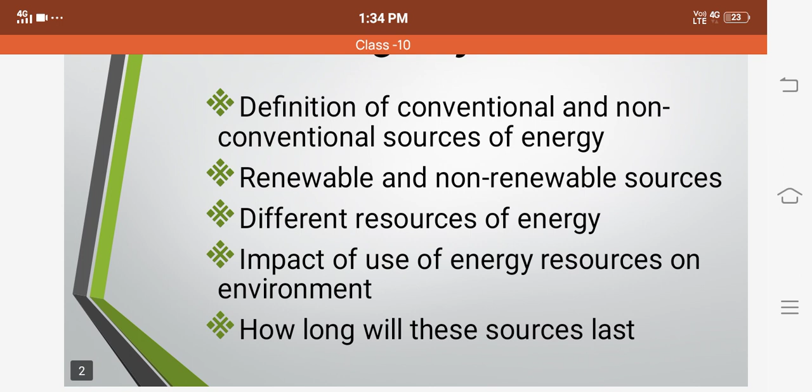In this chapter, we will cover definitions of conventional and non-conventional sources of energy, renewable and non-renewable sources of energy, different kinds of sources of energy present around us, the impact of use of energy sources on the immediate environment, and how long these sources will last. Coming first to conventional sources of energy.

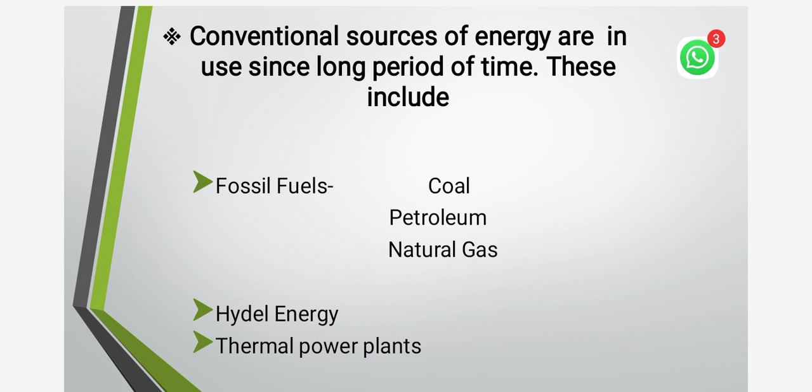Beta, these sources are in use since a long period of time. That's why these are called conventional sources of energy. These include basically fossil fuels, and fossil fuels are of different kinds like coal, petroleum, natural gas, which are obtained from fossils that got buried in the soil or under the sea millions of years ago. In addition, hydel energy and thermal power plants also use these conventional sources of energy.

Non-conventional sources of energy are those sources which are alternatives to conventional sources of energy. These sources are also known as renewable sources of energy, as they are widely available around us. These will not exhaust in the near future. For example, solar energy - the sun rises every day, so its energy will not exhaust until the sun ends.

Conventional sources will run out in the near future if we don't save them. That's why these are known as non-renewable sources of energy. Beta, here we can say that conventional sources of energy are non-renewable sources of energy, whereas non-conventional sources of energy are renewable sources of energy.

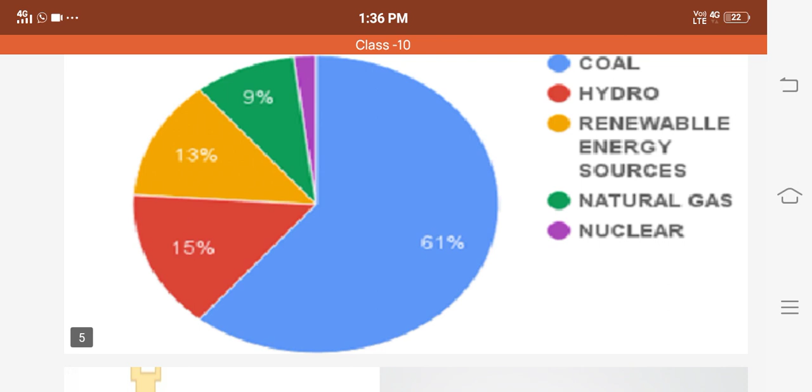In India, over the last decades, different kinds of energy sources have been used. For example, coal made up almost 61% of the total energy requirement in recent decades, whereas 15% of energy was generated from hydropower, and natural gas formed only 9%, while renewable sources were only 13%. A little energy was also obtained from the nucleus, known as nuclear energy.

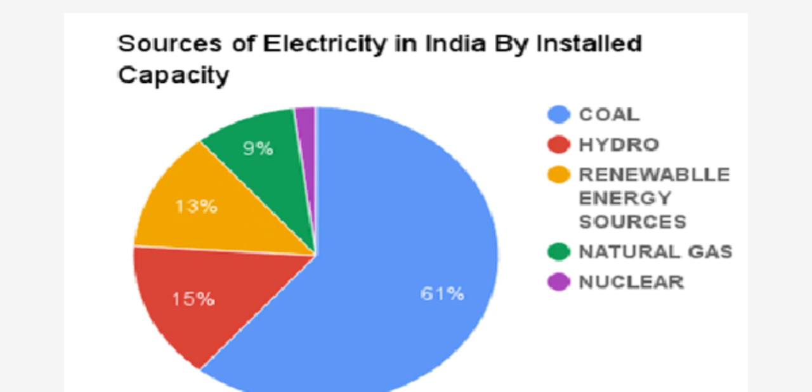So the use of renewable sources is very low till today, and these need to be increased in the present as well as in the future. First, we will consider conventional sources of energy.

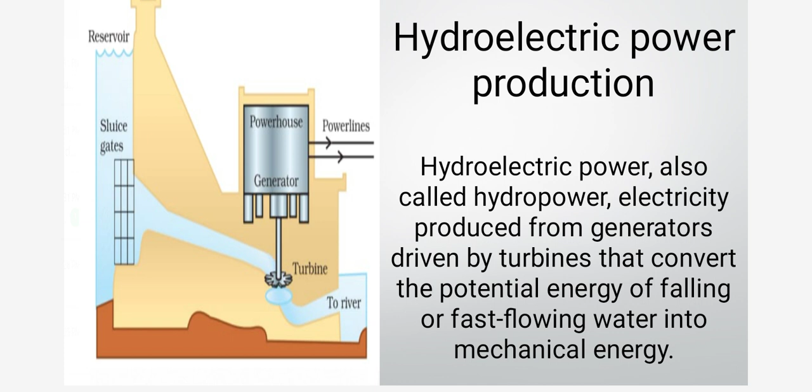Hydroelectric power production basically uses the energy generated from water. Here the water moves and its kinetic energy is changed into electricity by running the turbine. When turbines run, the kinetic energy of the water changes into the mechanical energy of the turbine and gets converted into electricity. So finally we get electricity from the potential energy of standing water, and this is generally generated at dam sites.

So here different forms of energy are changing. For example, I am repeating it again: heat first changes into kinetic energy, kinetic energy changes into electricity, and electricity changes into light and heat through the use of the bulb.

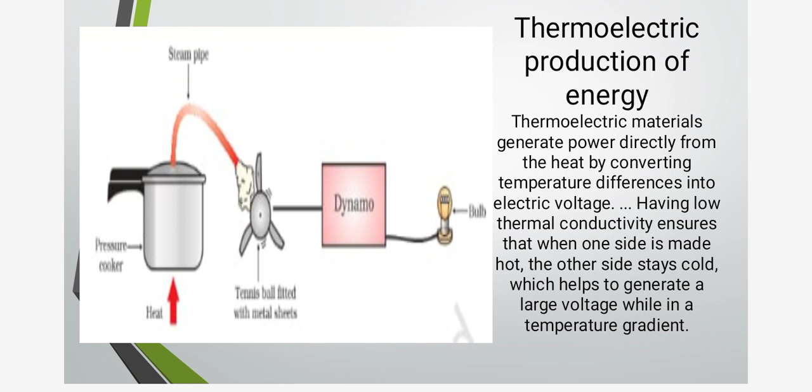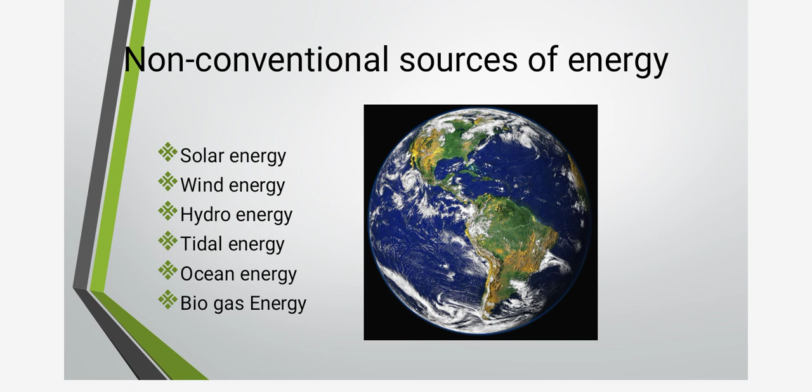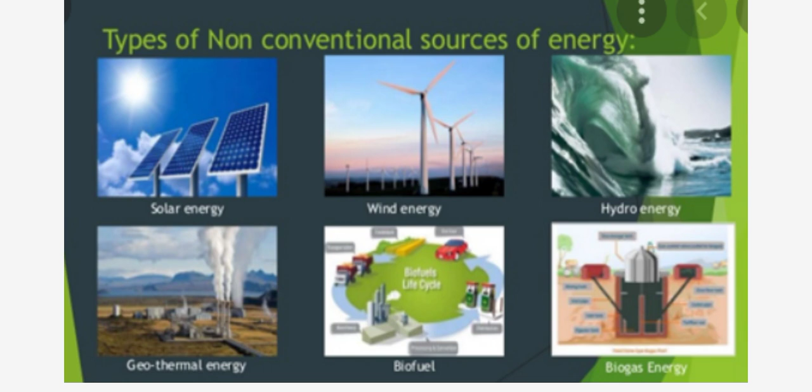Various kinds of non-conventional sources of energy being developed these days include solar energy, wind energy, hydro energy - especially from moving water - tidal energy, ocean energy, and biogas energy. These have different sources like solar energy panels, windmills, biogas plants, etc. Coming to solar energy.

The sun is a vast source of energy for us, and we can use it for different purposes like heating and producing electricity. For producing electricity, we generally use solar cells. One solar cell is capable of developing a voltage of 0.5 to 1.0 volt, which produces only 0.7 watt of electricity.

This electricity is a very small amount and is not capable of doing any work. Therefore, a single solar cell is not capable, and we need to form a solar panel by arranging different solar cells. The total energy produced by the different cells is used for generating electricity, lighting our homes, and heating water in geysers. Solar cooker is also a very old system of cooking food using solar energy.

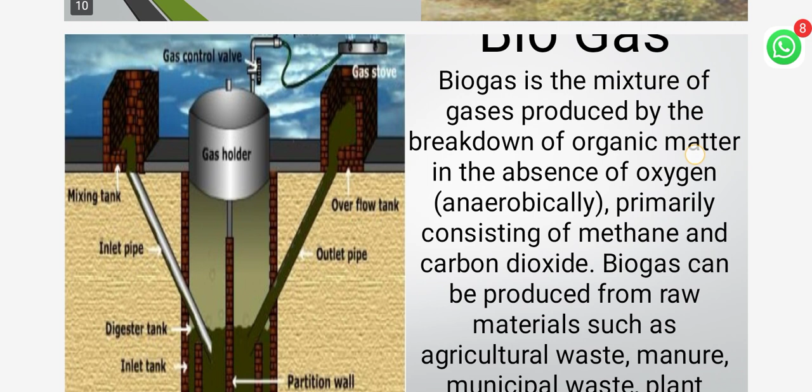Biogas. This is another method of using a conventional source of energy but in a technically improved manner, because bio sources like plant and animal excreta were used long ago in India for generating energy, and that was harmful for the environment also. Therefore, with new technique, biogas started to be formed.

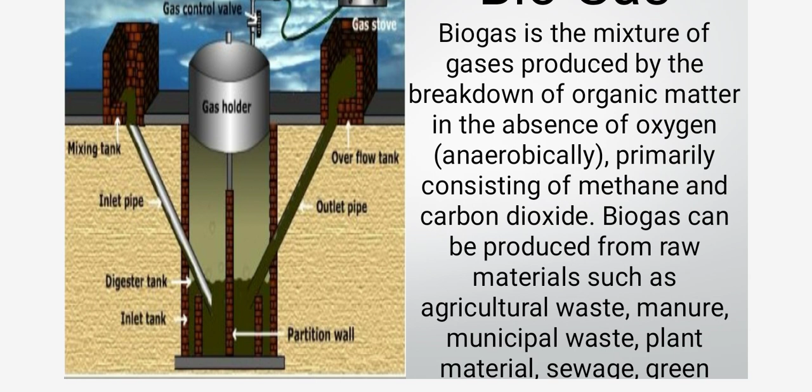In a biogas plant, plant and animal excreta, in the absence of oxygen, that is an anaerobic condition, forms methane and carbon dioxide, which are known as biogas. So we can say biogas is a mixture of different gases like methane and carbon dioxide. This can be produced from raw material, which may be plant product or animal product like manure, municipal waste, plant material, sewage waste, green waste, etc.

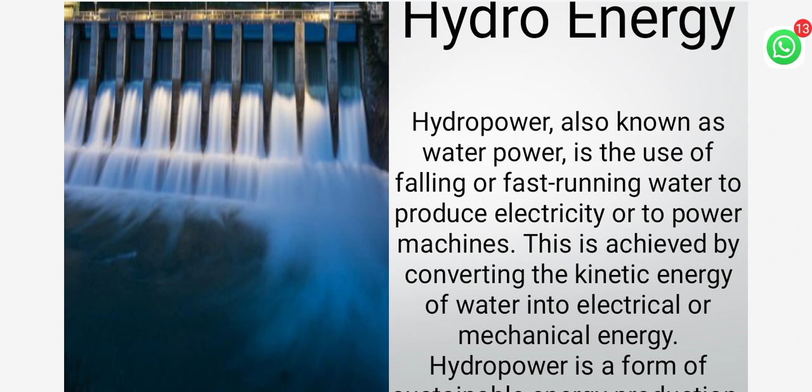Hydro energy. Hydro energy, or water energy, is the use of falling water, where potential energy changes into kinetic energy, and this kinetic energy is used to run turbines, as discussed earlier, and then the turbine generates electricity. This is one of the major sources of energy in our country. For example, Bhakra Nangal in our area is a useful source of electricity in North India.

Wind energy. Wind energy is another renewable source of energy, as winds are available every day and are produced due to the different heating of the earth at different places, causing the wind to move. The kinetic energy of the wind can be used to do mechanical work like grinding seeds, and it can also be used in production of electricity. But for that, a single windmill is not capable, so we need to form a windmill farm where thousands of windmills together work and produce electricity.

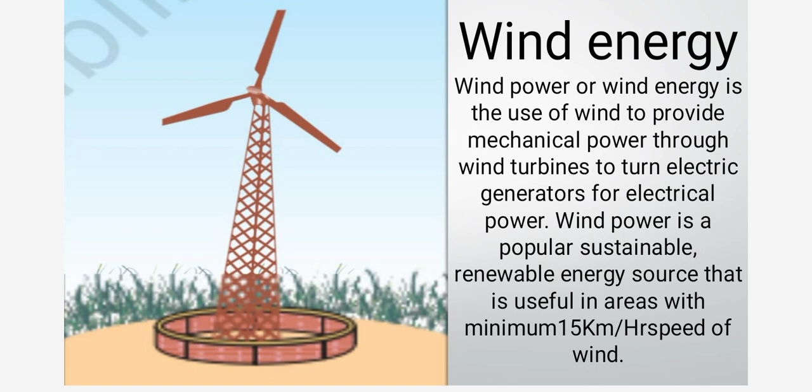One more condition is that it requires high wind speed, at least a speed of 15 km per hour, to run the windmill, which is available in southern India. That's why windmill is a good source of producing energy in South India.

Other sources: ocean energy, which is available in the form of tides and wave currents, is used to produce electricity in areas near the sea. This energy is also a renewable source of energy.

Geothermal energy. Geothermal power is the power generated by geothermal energy. Technologies used include dry steam power stations, flash steam power stations, and binary cycle power stations, different kinds of power stations for changing geothermal energy into electricity. Although it is not used at a large scale, there are still 26 countries where electricity is generated from geothermal energy, and in 70 countries it is used for heating. It works based on the different temperature on the surface of the earth and beneath the earth.

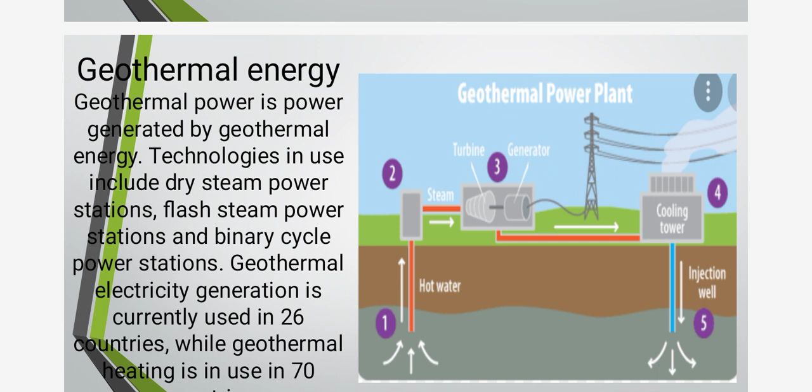Nuclear energy. Enormous amount of energy. As we know, an atom has a nucleus at its center, and when the nucleus participates in a reaction, those reactions are called nuclear reactions, which may be fission or fusion. Fission means when a nucleus divides and produces energy, and fusion means combining two or more nuclei to produce a single one. Enormous amounts of energy are produced in both fission and fusion reactions. What we need here is a nuclear reactor, which controls the amount of energy and produces electricity.

So nuclear reactions are used for producing a tremendous amount of energy.

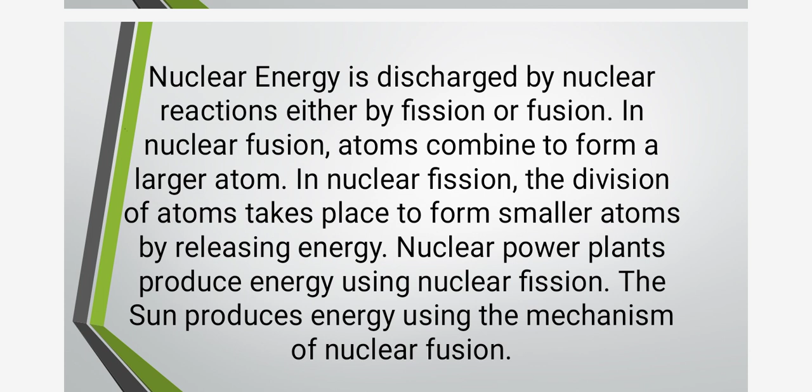Our sun also produces energy using nuclear fusion, but that does not produce any kind of harmful gases and does not affect our environment. So that is a different thing. But here in our country, when nuclear reactors are used, if leakage takes place, then it affects the environment a lot.

So this was about the different kinds of sources of energy, and these sources, whether it is nuclear energy or geothermal energy or any other conventional source of energy like fossil fuel, affect the environment, and how they produce impact on the environment we are going to study now. So here we will study first the impact of the renewable sources of energy.

As we know, renewable sources of energy like biogas, wind energy, sunlight do not have any drastic effect on the environment directly and are 100% safe. But still, these resources damage the environment when these are manufactured, transported from one place to another, and installed, because in all these processes we have to take help of conventional sources of energy. So their manufacturing, transportation, and installation are certain factors which cause damage to the environment to a certain extent.

Coming to non-renewable sources of energy. Non-renewable sources of energy generally produce fumes and cause air pollution, or water pollution when these pollutants enter into the water, like carbon dioxide, nitric oxide, nitrous oxide produced by the conventional sources. They affect the water bodies and cause water pollution.

So we can say conventional sources are having a drastic effect on the environment, and now it becomes our duty to save the environment. And what we can do to save it is, we should use these sources judiciously so that we can prevent air, water, soil pollution, we can protect wildlife, and of course, if we are saving air, water, soil and wildlife, then it will make us healthy and protect our health.

Now the question arises, if we are not judiciously using these sources, what will be the effect? The effect will be that these sources will not last longer. The energy sources like the sun, the movement of the waves, flow of river, these are activities which have been happening for millions of years and will of course continue for many millions of years. And these are constant, reliable sources and will last for a longer time.

But what about non-renewable sources of energy? These are limited, as we discussed. They take thousands of years to form, but are exhausting at a very high speed. And at the present rate of consumption, these resources will get exhausted in less than 100 years. So what will happen then? That is the problem, and we will have to consider it.

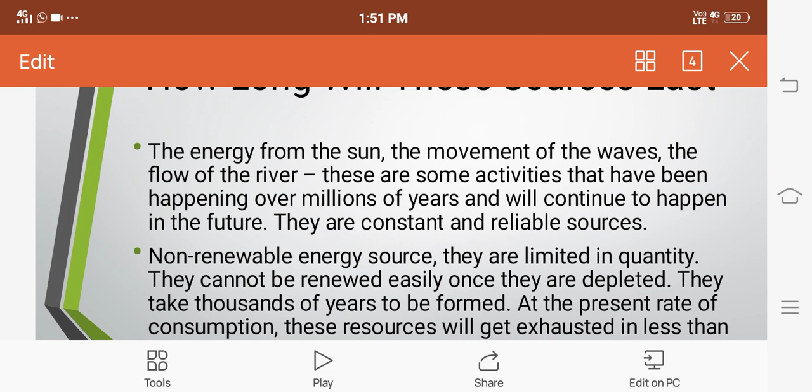So now is the time for the recapitulation. Today we studied different topics regarding the conventional and non-conventional sources of energy, how these are defined as renewable and non-renewable sources of energy, what are the reasons of the pollution they cause, how can we stop them, and how long will these sources last.